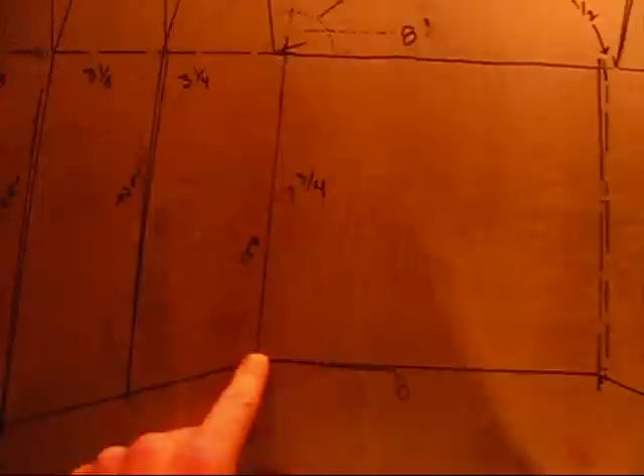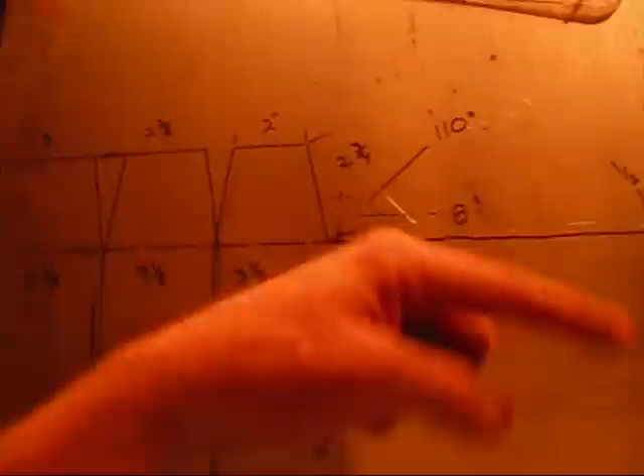Okay, straight across here on this square, the primary square plate, which is where the exhaust is at, the exhaust panel, I've got 8 inches straight across, and straight down I've got 7 3/4. Now remember, this stuff is going to stretch. The 8 inches is exactly the width that's on the cart. So when I go to bend this, it's going to stretch it slightly, so it should be able to fit on there really nice.

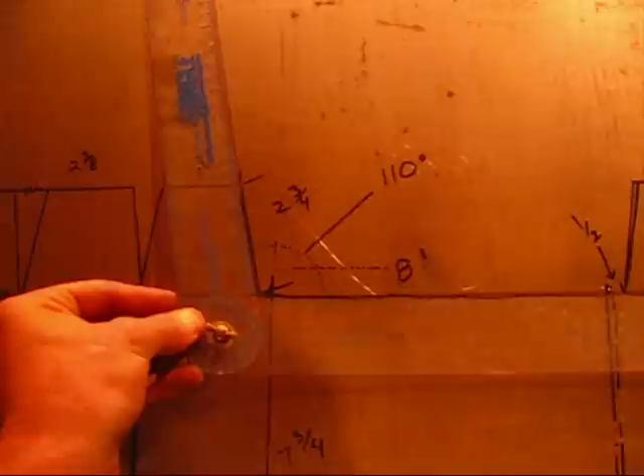Then I measured out a half inch to compensate, you'll see. Anyway, so I measured out a half inch, and then this angle right here is a 110 degree angle. That's what this protractor is set up at, 110 degrees. Its length is 2 3/4 from this point up to this point.

This here is also 110 degrees, okay. That's measured at 2 inches. Now these measurements are probably a little off because I'm using a Sharpie and the pen part's got thickness to it, so this isn't absolute precision here. But anyway, so that's 2 inches. This here is also 110 and 110. 110.

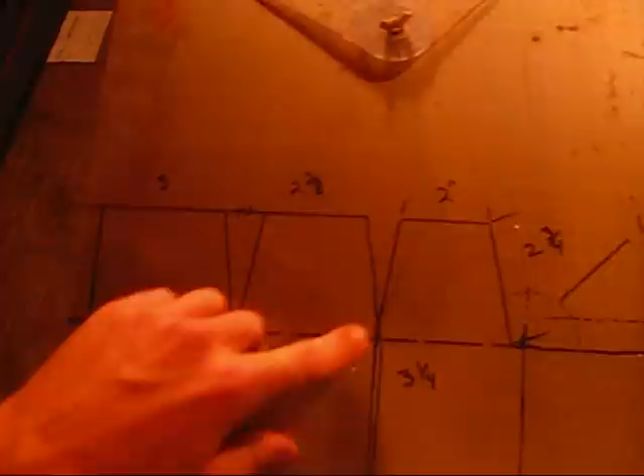110. Measured up the same distance, 2 3/4. That's 2 and, well, looks like a 7 on the camera, but it's actually 2 3/8, the distance from this point over to this point. And then these are also 110 degrees.

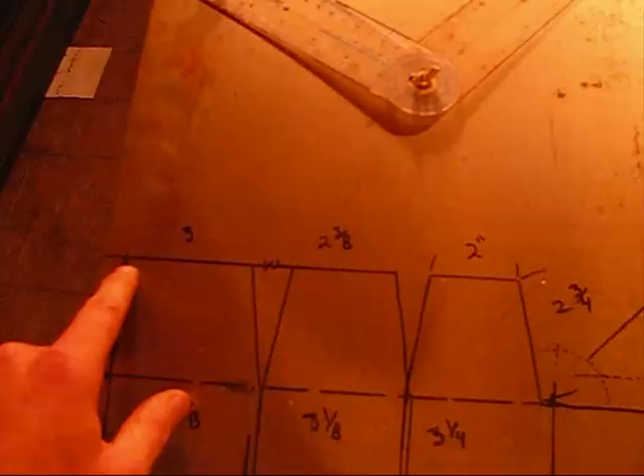And then this distance here is 3 inches. And the 3 inches is actually, let me pull this out, make sure I'm right on this. The 3 inches, so technically we're looking at, from the line over, we're looking at 3 inches, but adding on the extra half, we're looking at 3 1/2. But that's going to be cut out of there.

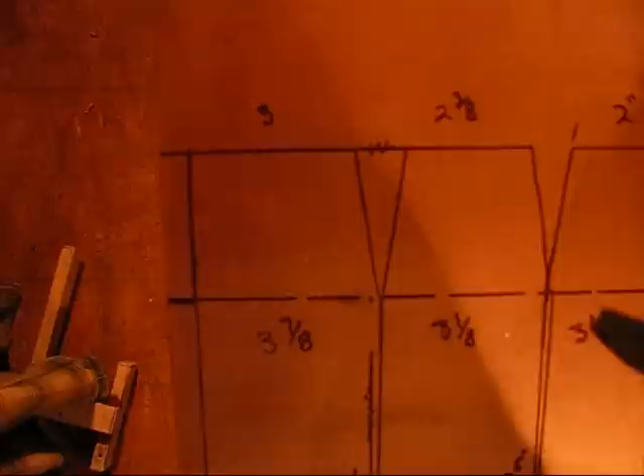This is going to be cut out right there, all the way down, and then over, because all this will be left on. Okay, so now you've got this 90 degree angle right here, comes down, and then I got a 90 degree angle right here. That distance is, okay, I had to measure that all out again. So this is a 90 degree angle here, going down.

Hold on, okay, had to measure this out again. But this is a 90 degree angle here, going down 2 5/8, with a 90 degree angle here, and then coming out a half inch. Measure down a full 11 inches, and then putting the mark there. I'll probably just got to get away with making it, well, nah, never mind.

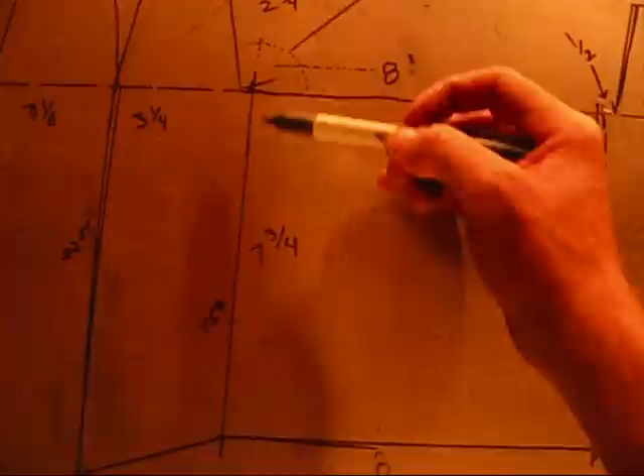But anyways, coming back over here, the 7 3/4 inch, which is the length of this, we're going to come back here and measure out from this point. We're going to put the protractor on there, like that, and from this point, coming down here to that point, we're looking at about 20 degrees. That's about a 20 degree angle there. So,

Once you mark all that up on a piece of paper, then you'll just take the piece of paper and fold it back over, keep the square intact, and then you'll be able to do the same thing over on here. You see how I messed up? But anyway, so then...